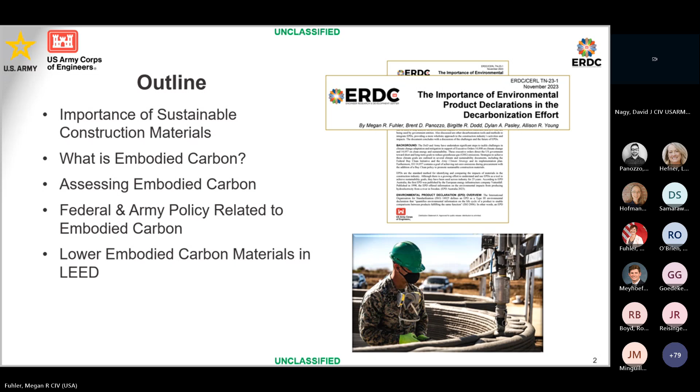In this portion of the presentation, we're going to go through the importance of sustainable materials in construction, a quick lesson on what embodied carbon is and how to assess it, embodied carbon related policy with a focus on some of the latest policy guidance, and a quick look at some LEED credits related to lower embodied materials.

As recent studies have shown and executive orders have addressed, sustainable construction materials are essential for minimizing environmental impact and promoting a greener future. With a major source of global GHG emissions being from the four listed high volume construction materials, there's been a federal focus on tracking, labeling, and reducing embodied emissions in these and other construction materials since Executive Order 14057 was signed into effect.

There are many positive impacts to the use of sustainable construction materials because these materials are less resource intensive and more eco-friendly. Their use instead of standard construction materials allows us to take a larger stride toward the path of environmental preservation. If specified correctly, sustainable materials can also contribute to energy efficient buildings by enhancing insulation and allowing for right-sizing of HVAC units, which can provide savings in energy and lifetime cost.

Indoor air quality improvements occur because sustainable materials emit fewer harmful chemicals and pollutants, which positively impacts human health and well-being. Finally, sustainable materials can be more durable and require less maintenance, which provides a long-term economic advantage.

As I highlighted in green, I'm going to focus on the reduction of negative environmental impacts through these materials, more specifically the reduction of embodied carbon.

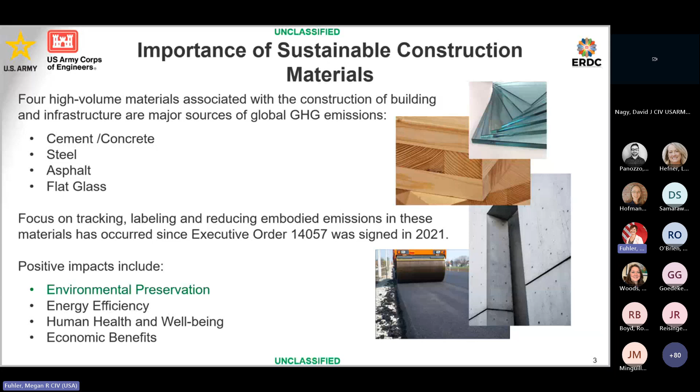But before diving into policy impacts, I want to give you a quick overview on embodied carbon. Embodied carbon is essentially the carbon footprint of a material, building, or infrastructure project. It refers to the amount of greenhouse gas emissions associated with the extraction, production, transportation, manufacturing, maintenance, demolition, and recycling of the project.

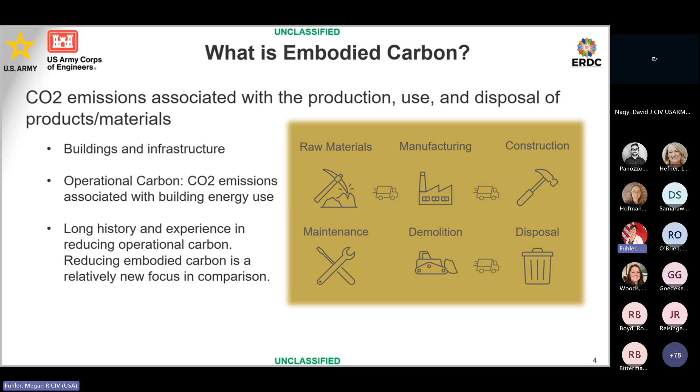It includes both upstream and downstream stages of a material's life cycle. You hear the phrase cradle to gate - this is cradle to grave, looking at all of the carbon involved. This is a bit different than operational carbon, which is the emissions associated with building energy use. Operational carbon has been a focus for quite some time, but embodied carbon reductions are relatively new in comparison.

In terms of assessing embodied carbon, there are several ways to do so. EPDs, environmental product declarations, are intended to help understand the embodied carbon of a product. Standardization is still being developed, but ideally EPDs will be useful in procurement decisions, either by comparing similar products or comparing that product to a product baseline.

That said, product baselines are still also being developed. A little plug here - if you'd like to read more about EPDs, our team did publish a tech note in November of 2023 that has a lot of good information.

Second, life cycle assessments calculate the environmental impacts of a product over its span. These can be done on specific materials or can be calculated on a whole building level. The EPA is currently working on a labeling program to make it easier to identify low embodied carbon products. This labeling program would be similar to Energy Star and WaterSense.

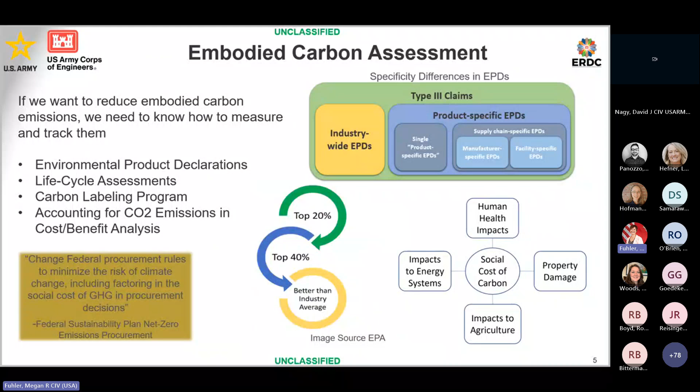In terms of accounting for those CO2 emissions, there's still a lot of work to do. The application of social cost of carbon is probably the ideal solution in order to factor into the decision making. But because these variables are not easily represented in monetary terms, they can often be overshadowed in the cost analysis. As of now, in terms of social cost of carbon, there is not an agreed upon method or value for incorporating that cost.

On to federal and Army policy. There are several applicable federal and Army policies related to embodied carbon. EO 14057 was probably a catalyst towards the GHG emissions reductions, and it lays out some specific and lofty goals regarding GHG reduction and sustainability. Per the implementing instructions, all new construction and modernization projects over 25,000 square feet should be using sustainable materials and low embodied carbon materials as determined.

Many of the other policies listed on this slide speak to net zero emissions procurement goals as well. But because we have new policy guidance out fresh off from the press in March, I want to focus more specifically on that - the Department of Army policy guidance on resilient buildings.

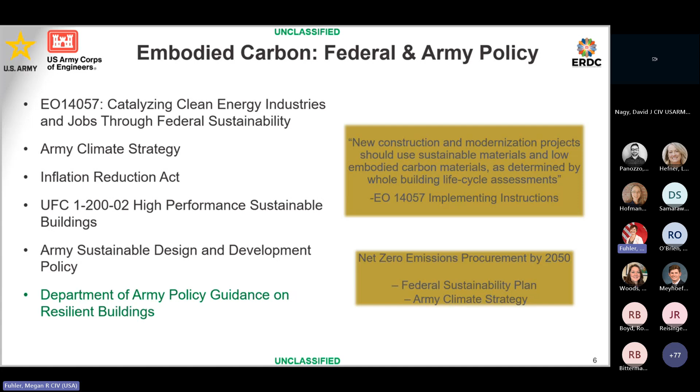This policy guidance is effective immediately for all construction projects other than FSRM. So this is effective immediately for FY27 projects. For FY25 and 26 projects, there is an expectation that proponents evaluate a project for reasonable changes to planning and design to incorporate these efficiencies, unless the cost or project acquisition timeline are impacted in such a way that the completion dates cannot be met.

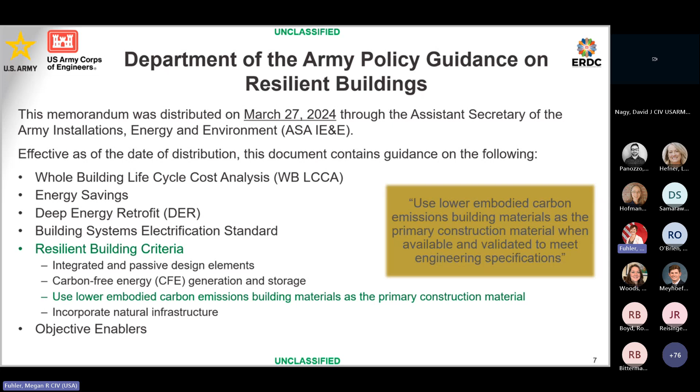This memo touches on many aspects, including whole building life cycle cost analysis, energy savings, electrification standards, and deep energy retrofits, but I want to highlight that portion that relates directly to our sustainable materials research by focusing on the lower embodied carbon emission building materials as a primary construction material.

This policy guidance for lower embodied carbon materials in MILCON indicates that they should be used when available and validated to meet engineering specifications. Regional availability, costs, and impacts on construction timeliness may factor into the use of these materials, but they should be considered as part of the 35% design submittal.

Designers should also be requesting and reviewing product-specific EPDs, type 3 specifically, to evaluate and select those materials. The Army currently has specific pilot projects using lower embodied carbon materials, and they do include LCA documentation, EPD tracking, and other sustainability initiatives that will be used to inform the feasibility for use across MILCON.

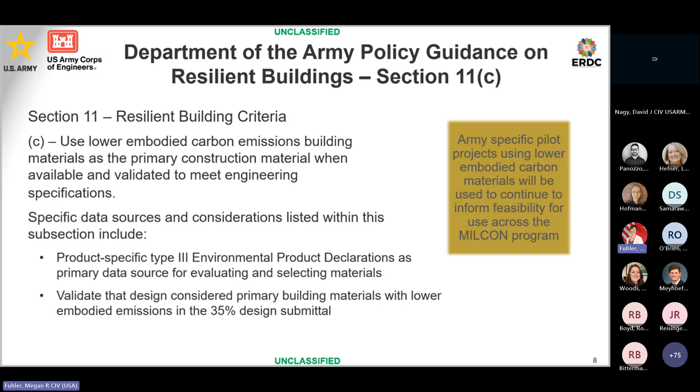This policy guidance will likely lead to the creation of some new ECBs through USACE headquarters and an update to UFC 1-200-02. More information regarding that will likely be forthcoming.

And then finally, before turning things over to Jerry, I wanted to provide a quick overview on LEED with regards to lower embodied carbon materials. I believe there's going to be a more thorough look at LEED in a future webinar, but I will focus only on the materials and resources category. As most of you probably know, any new or major renovation project requires LEED Silver, and there are several credits directly related to embodied carbon, including EPDs and whole building LCAs that can get your project closer to meeting that LEED Silver requirement.

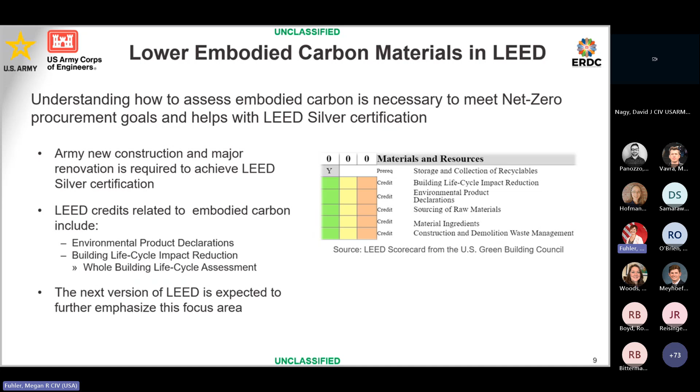I went through my slides pretty quickly, but now that you have a brief overview of sustainable materials with a focus on embodied carbon, I'm going to hand things over to Jerry, who can give you some more specifics on sustainable concrete.

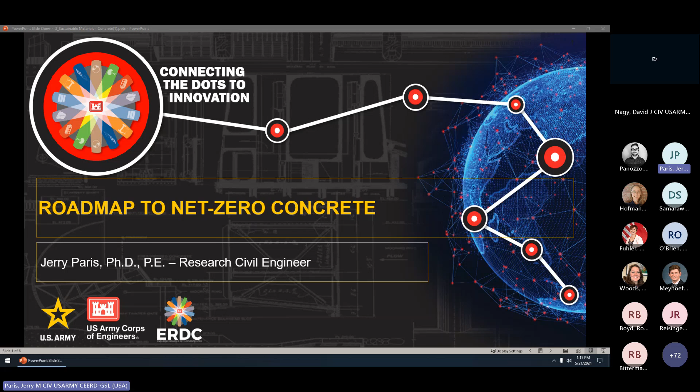So essentially what we're going to be talking about is where we're at, what the goals are, where we're going, and hopefully how we're going to get there.

So as Megan was talking about a little bit earlier, there are some policy drivers that essentially started with Executive Order 14057, or the Buy Clean Act. Essentially the main edicts here were the 50% reductions of emissions by 2032, along with a net zero building emissions qualifier by 2045. That kind of pushed the tri-services groups to come up with climate implementation plans. So for the Army climate strategy, they kind of followed the executive order pretty much to a T, with the 50% reductions by 2032 and net zero by 2045.

The Navy was similar, but with a net zero by 2050. And then the Air Force climate campaign plan was following the executive order, but shifted by about a year, following in total with the DoD climate adaptation plan, which has a net zero by 2050.

And in general, these on the surface look pretty understandable. Everyone kind of knows what net zero typically means, effectively zero emissions. But the complication here is the 50% reductions, right? As you start digging into that, you start asking the question of 50% reductions of what? And that's a little bit of the nebulous portion here.

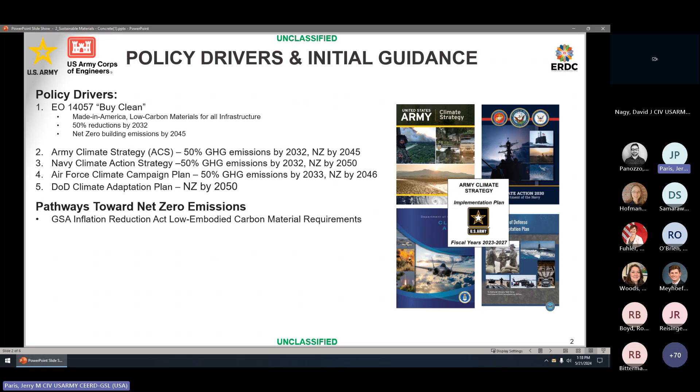So what the industry is doing at this point is saying, okay, we're going to try to make up greenhouse gas limitations. This has been done by a couple different groups. GSA has the Inflation Reduction Act for low embodied carbon material requirements, which we'll talk about in a second. The American Concrete Institute has a number of committees related to sustainability, including the most recent one, 323, the Low Carbon Concrete Code Committee, as well as other groups such as the Carbon Leadership Forum.

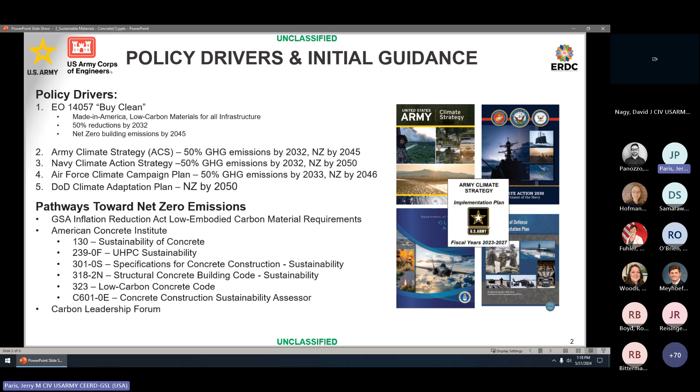And what these all tend to do is prescribe greenhouse gas emissions limits as a function of concrete strength. So what this generally looks like is you'll usually have a table that will give you emissions limits in terms of kilograms of CO2 per cubic meter as a function of the concrete strength.

So if we look back at the Carbon Leadership Forum for 2021, this generally makes sense. As the concrete strength goes up, you typically need more cement, so your limits tend to be higher with the higher strengths, and that generally makes sense.

In this document, they noted that they are treating a baseline as a static reference against which to compare progress towards a goal, which is exactly what we want, right? We want a baseline value, because ideally we're going to go back to that 2005, 2008 timeframe.

So having some sort of a baseline to work off of is great. And then two years later, they produced more baseline values, and they're dramatically lower. They removed the definition of what they are considering a baseline. What ends up happening is, for this data set, this baseline is actually representative of a 30% fly ash replacement, or removing 30% of the cement within a concrete and replacing it with a waste material. That's why these numbers are considerably lower than the data set from two years prior.

If we look at the GSA values, there are different limits for the top 20 versus top 40 and top 80%. But what you'll notice is that the limitations to meet a top 20 for the GSA limits are actually even lower still. And then we get to the ACI 323 limits.

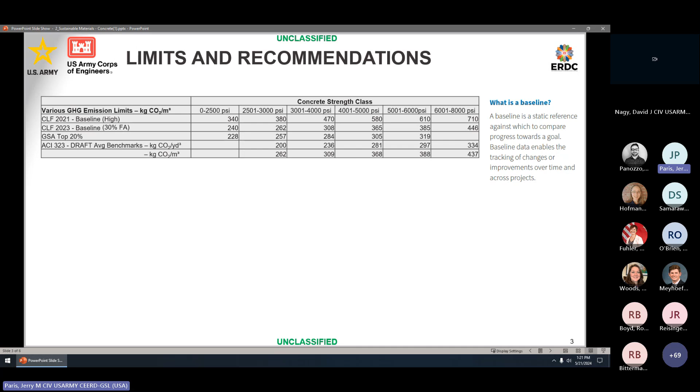What you'll notice is that these are very, very similar to the Carbon Leadership Forum 2023 baseline values, that 30% fly ash replacement, because they're working from the exact same data set. So all of these numbers should be very, very similar.

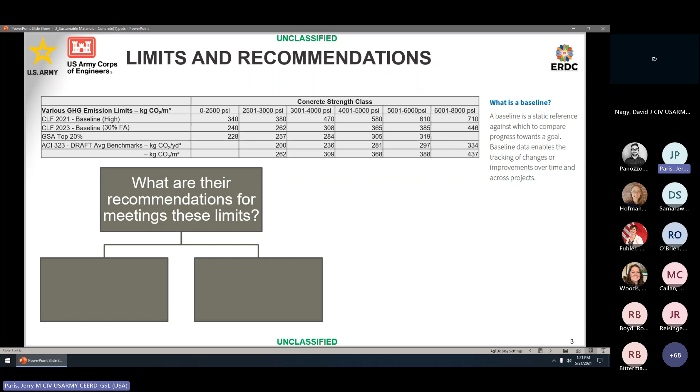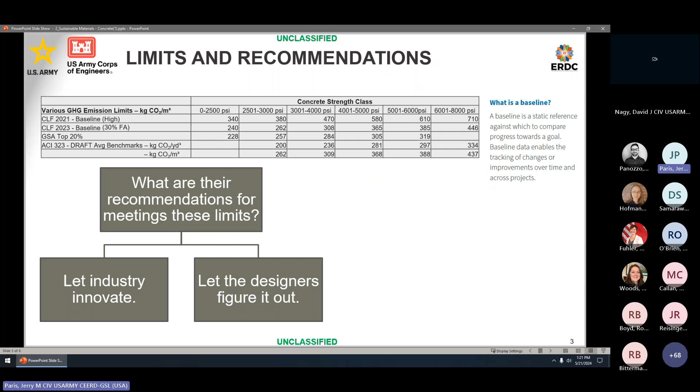So the problem that I foresee with this is that as we start looking at these, they are giving limits, but they're not really explaining how to reach these baseline values. In general, there seems to be two ways that they're approaching this. One is letting the industry innovate, just saying that our concrete and cement producers are going to have to get better products. The second is letting the designers, the engineers and the architects figure it out for themselves. To me, this appears to be a little bit of kicking the can down the road.

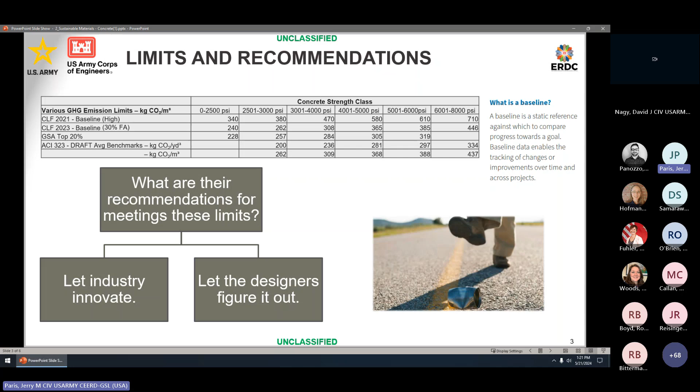So ideally, what we are trying to do is be the bridge between the gap of what you have to do and how do you actually get there. What we are trying to do is develop realistic plans. I've got this as a proposed plan. Nothing is finalized in this, but this is generally what we're working towards currently.

If we look at the three main sources of limits, ACI 323 provides about 30 pages of specifications, whereas the GSA and the Carbon Leadership Forum can essentially be broken down into a table or two. Our plan is to start with the ACI 323 document because it is the most developed currently. Their general approach is they break up the United States by region and choose benchmark values dependent on where you are located, because there is geographic pressure into what you can and can't do for cement production. So it makes more sense to break it down geographically.

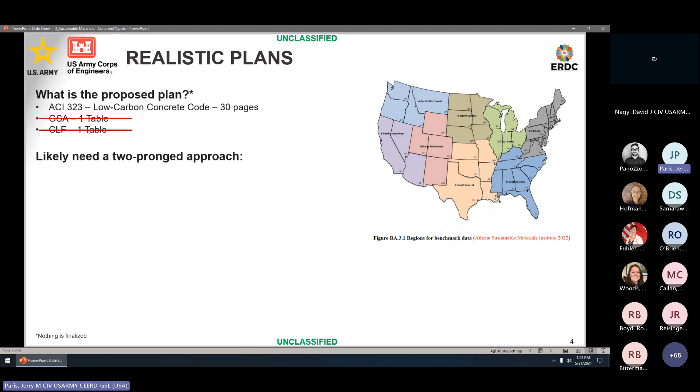As we move forward, there needs to be a two-pronged approach, because we have the 50% reduction by 2032, as well as the net zero by 2045, 2050. For the longer term approach, it's a lot more nebulous. Essentially, what we need to do is foster long-term innovations that deviate from known technologies toward net zero emissions.

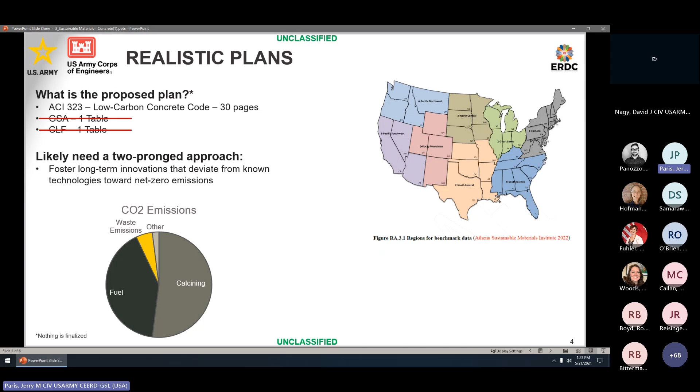And what I mean by that, this is my opinion, is that the current process by which cement is produced, I don't foresee that process being net zero, because if we look at the emissions as a function of Portland cement production, over half of it is coming from a calcination process, where you take limestone and heat it up until you drive off the CO2, and you're left with reactive calcium oxide. That's what that portion is. So if we were to have zero emission fuels and waste emissions today, we would still not be in a net zero process.

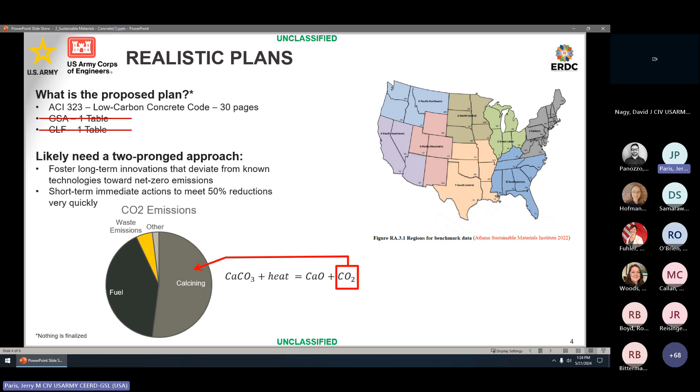In my opinion, I think we need to look at other processes that get away from this calcination in order to meet that large emission drop of net zero by 2045. But in the short term, there are immediate actions we can do to meet 50% reductions, and we can do that today.

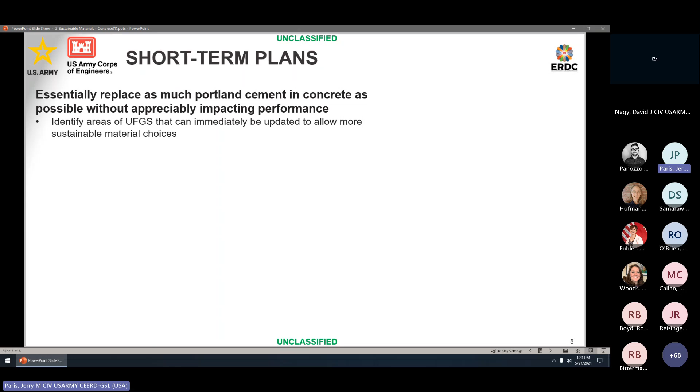So that's what my last slide is going to be about, how we can meet these 50% reductions today. Basically, we need to replace as much Portland cement in the concrete as possible without appreciably impacting performance. So what we've been doing is looking at different areas of the UFGS that can be immediately updated to allow more sustainable material choices.

A couple examples of this are in the UFGS for cast-in-place concrete. We've just got this approved, it's now in there as of February. We are allowing Type IT cements, which are ternary blended cements—a cement with two replacements blended into it.

These have the ability to reduce emissions by up to about 70%. The more realistic case is probably going to be 30 to 50% as they're delivered to the concrete ready mix producer, so they can do replacements in the field or at the ready mix facility as necessary based on the project. But we can pretty much almost hit those targets today. So those are now allowed in the cast-in-place spec.

We're also debating about including an over-design limit. For structural concrete, in order to guarantee that the vast majority of your concrete meets the minimum design strength, there's an over-design. So what we're thinking about doing is including a limit to how much over-design is built into it. As an example, this is a chart of over 850 production mixes from a ready mix facility. On the x-axis is the design concrete strength, and on the y-axis is the actual measured strength at 28 days.

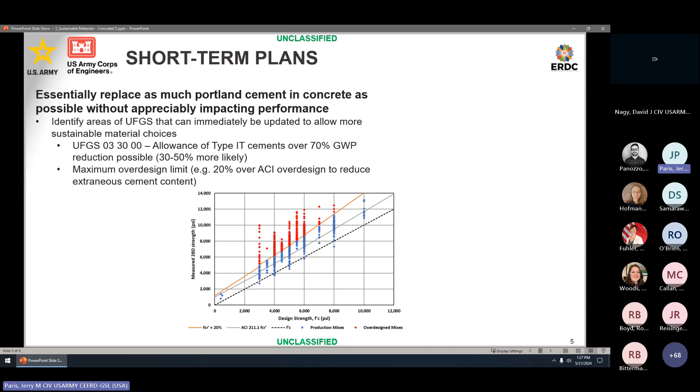For instance, the mixture is at 3,000 PSI—there's no need to have 8 to 10,000 PSI strength concrete when your design is 3,000. So you would be limiting it to about 5,000 maximum, and that requires the cement loading to reduce.

The other things that we're doing is we want to include materials that are performance-based, rather than things like fly ash or slag that have specifications. We want to look at performance qualifying material.

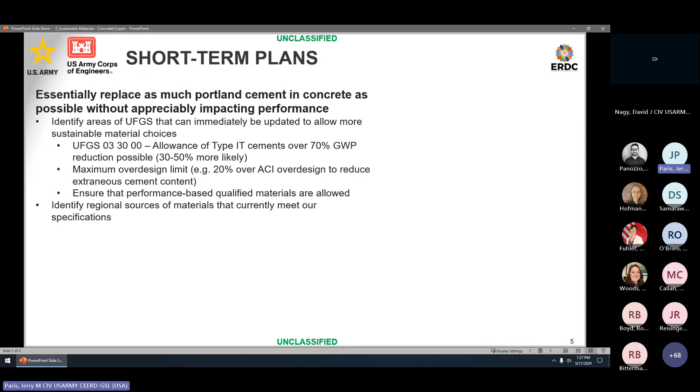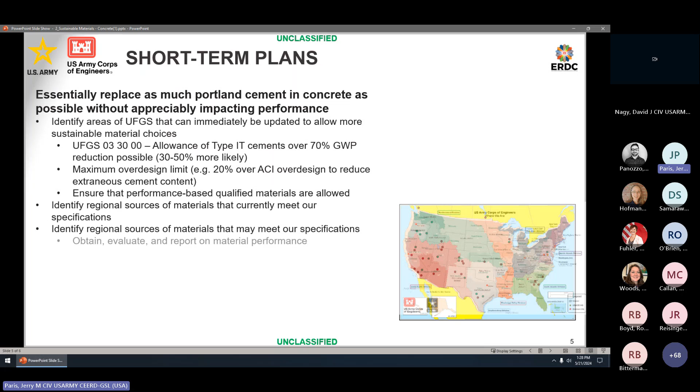And then lastly, and I think this is going to be the big push here, is we're trying to identify regional sources of material that currently meet our specifications, as well as regional materials that might meet our specifications. What we're attempting to do is locate these different places throughout the US and overlay them with the USACE divisions to see where these different materials lie. Then we're going to get these materials in-house and evaluate them for performance in concrete.

Ideally, we're going to take all of the information we gain and produce region-specific user guides that tell the user in different regions where the available sources are within their regions, how those different materials can impact concrete performance, and specifically if there's anything about those materials that dramatically reduces performance. For instance, does a certain cement replacement make the concrete worse in sulfate resistance or freeze-thaw resistance, so that you can apply that information to your particular application to know maybe one material is better for you than another. And we also want to incorporate reductions of global warming potential into these.

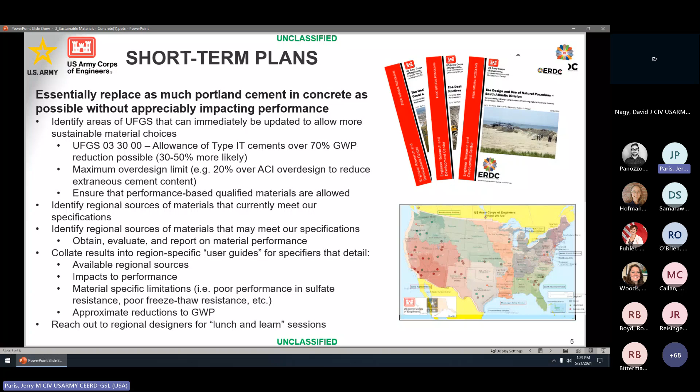And then finally, we want to reach out to the regional designers within these divisions once we have these user guides to do a lunch and learn session, to say here's what we've produced and how you would use these, and talk with your contractors to try to get these materials used to reduce global warming potential and emissions numbers down to those target benchmark values based on the strength classifications.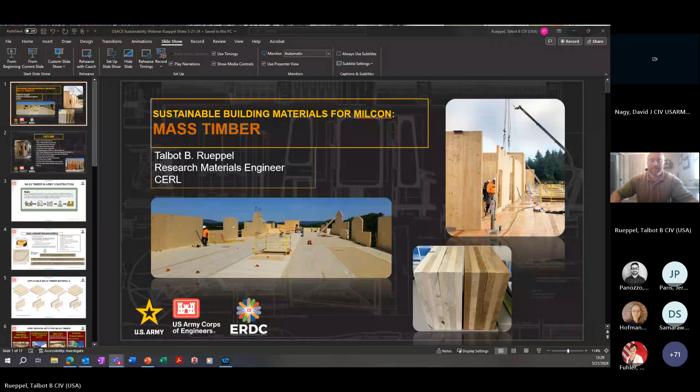Thank you all for making it out today. My name is Talbot Rueppel. I'm a research materials engineer here at the Construction Engineering Research Laboratory in Champaign, Illinois. Today I'm going to be speaking to you about mass timber and how it is a sustainable building material for military construction.

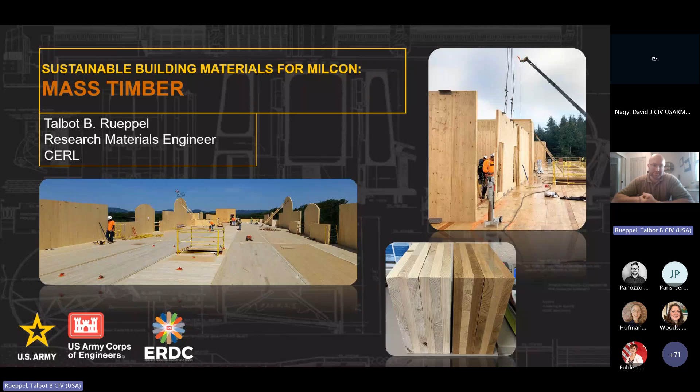An outline for this presentation: I'm going to start with the bottom line up front and go into how and why we want to use wood as a resilient building material. We'll speak about some of its attributes, as well as delve into some of the mission sets for which mass timber can be applied for the Army. Then I'll go over a couple of examples of mass timber proven in military construction, and that will bring us into some efforts for the Army to bring mass timber construction and design in-house rather than using a third-party agency to lead the design of a building.

This is through the 6.4 Research, Development, Test and Evaluation Project, Mitigation of Greenhouse Gases in Military Construction Materials. Two direct results of that were a mass timber engineering and construction bulletin, as well as a large technical report focused on concrete, mass timber, and asphalt materials and their sustainability attributes.

This will lead us into some relevant criteria and standards related to mass timber, some current early design considerations that have come to fruition through these pilot projects, as well as delving into some current mass timber EPDs, and then near-term and long-term modernization priorities and research requirements, respectively.

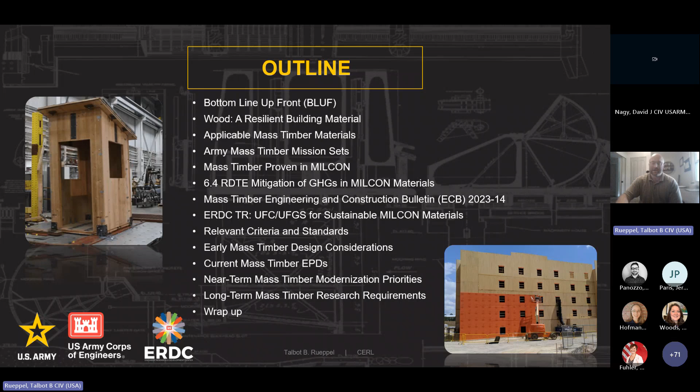So the bottom line up front: as one of the largest landowners in the world, managing over 550,000 facilities, the DoD needs to bridge the gap between public institution, private industry, and academia to design and develop with renewable lignocellulosic building materials such as wood, in pursuit of the Army climate strategy and Army installation strategy goals.

This involves sitting down with experts in the field and in academia, learning from them and working with them, and then being able to translate that into educational materials for our engineers who can then draft and build with these materials long term.

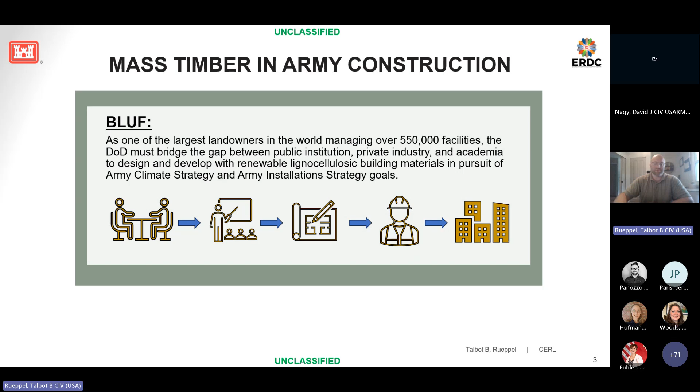Looking into the Department of the Army policy on resilient building materials, there are three main attributes a resilient building material must have. Number one, maximize the ability of the military to withstand and recover from disruptive events, such as extreme weather or disruption to energy and water supplies. Number two, a material must have minimal energy and water demand. Number three, it has an indoor environment optimized to promote humans' health and safety.

Wood can meet all of these resilient building material criteria in one way or another. It's abundant and regenerative. Using wood results in avoided embodied carbon as opposed to alternative materials. Wood is also lightweight, reclaimable, and durable when properly designed with. It's biophilic and improves indoor air quality. It's also aesthetic and offers design flexibility through prefabrication methods.

Wood is also 5 times lighter than concrete and 15 times lighter than steel. This dramatically reduces your transportation requirements and labor requirements on site. It also costs 20 to 30% less per square foot for 1 to 4 story office buildings compared to counterparts. Really, this is the optimal design criteria and profile for a DoD building, as the DoD typically does not build much higher than 4 to 6 stories.

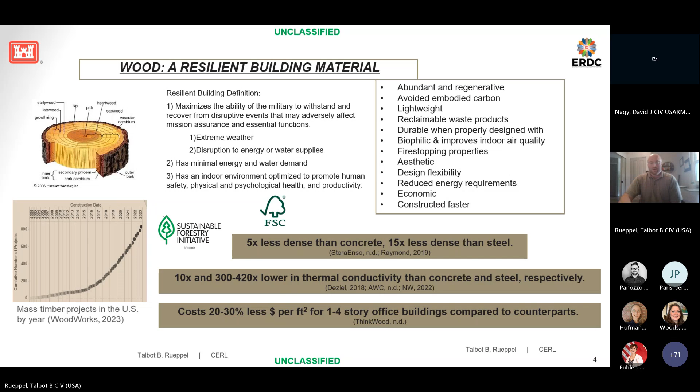There's also dowel laminated timber (DLT) and nail laminated timber (NLT). Mass plywood panels are another very good product that enables the use of wood as either a load-bearing application or a spanning application. It essentially can serve as a hybrid product between CLT and glulam. There's also laminated veneer lumber, which is typically used for load-bearing applications for columns and beams, parallel strand lumber, and laminated strand lumber.

Essentially, what all these mass timber materials do is enable the use of wood for applications which could not be met with traditional dimensional lumber products. It enables the use of wood for larger applications.

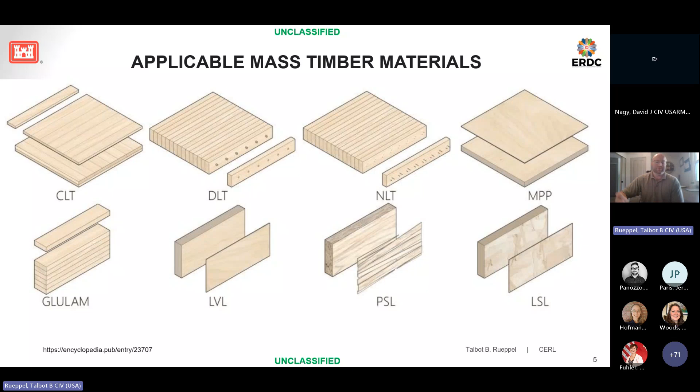The mission sets to which mass timber applies are forward operating bases, anti-terrorism and force protection, as well as military construction and historic preservation. Today we are focusing on military construction, in which actually 4 cross-laminated timber hotels are operational through the Army via the Privatization of Army Lodging Program, which we will discuss now.

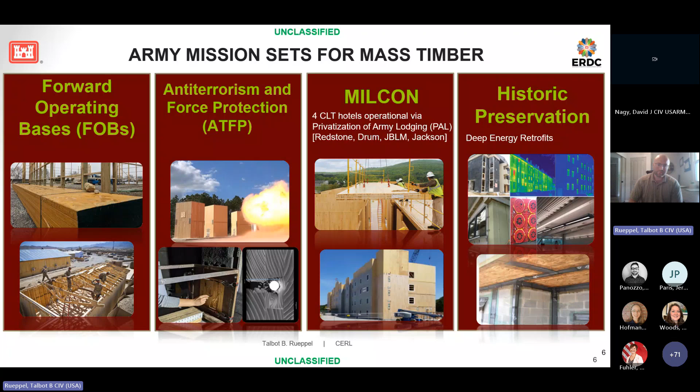Mass timber has been proven in MilCon. Back in 2016, the Army funded the construction of the first cross-laminated timber hotel in the United States. However, none of the design was performed in-house; it was essentially outsourced to Lendlease, a design build contractor, who has completed 4 hotels of cross-laminated timber and will complete their 5th at Fort Liberty in North Carolina in 2026.

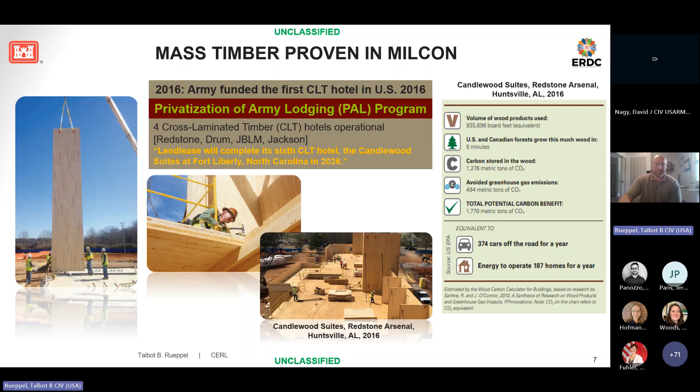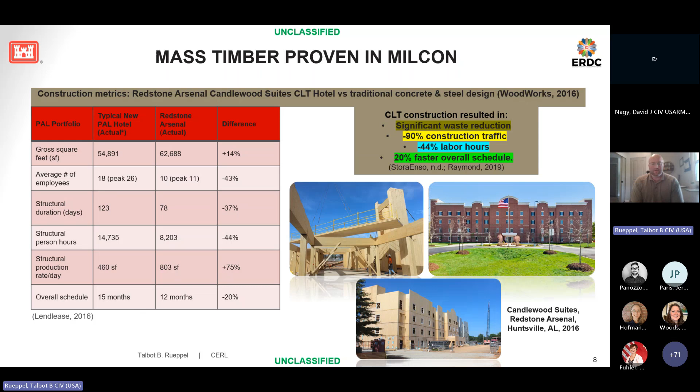I want to go into some more metrics that were a direct result of the Candlewood Suites construction back in 2016. Using CLT construction resulted in significant waste reduction compared to a typical concrete and steel structure: about a 90% reduction in construction traffic, nearly a 45% reduction in labor hours, and a 20% faster overall schedule. The average number of employees was nearly cut in half, really because prefabrication methods within the mill take care of and mitigate a lot of the required on-site labor.

So the Army wants to be able to design and build with mass timber in-house rather than having to use a third party to lead these efforts. What that requires is that we educate our professional engineers and structural engineers to be able to build with this material. Although it's not really a new material, to the U.S. industry and especially to the DoD, it is.

With this effort came the 6.4 Research and Development Technology and Integration Program titled Mitigation of Greenhouse Gases in Military Construction Materials. Task 1 involved strategy and coordination. Task 2 involved life cycle assessment of the Task 3 through 5 materials, which were low carbon concrete, timber, and recycled asphalt. Task 6 was ultimately transition and modernization.

Our goals for this project were really to identify low-hanging fruit, unified facilities criteria, and unified facilities guide specifications of which we could implement criteria change requests immediately. Further down the line, we wanted to leverage the expertise of industry to demonstrate the use of commercially available off-the-shelf materials in a relevant mission set and Army environment. Thereafter, we wanted to assess the constructability metrics and perform a life cycle assessment on those systems. This is an ongoing effort in which we plan to have a lot of innovation.

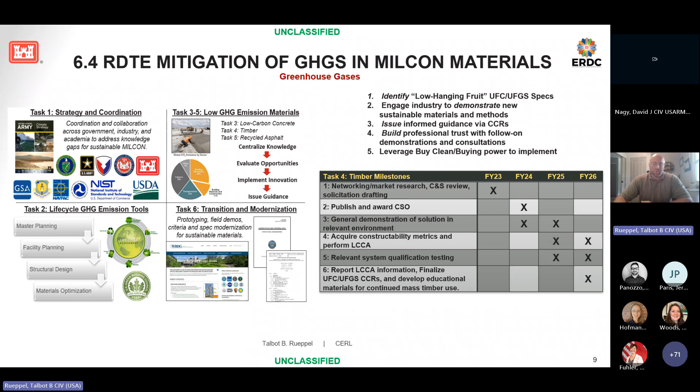One direct result of this project, back in fiscal year 23, was this Mass Timber Engineering and Construction Bulletin titled Mandatory Consideration of Mass Timber in Army MilCon and Civil Works Vertical Construction Projects. The key takeaways are that project delivery teams must consider at least one mass timber structural solution starting in fiscal year 26 for military construction, and all structural systems considered during design must be documented via a life cycle cost analysis.

However, a full life cycle analysis is not required. So a life cycle cost analysis at this point is required, but a life cycle assessment is not. Also, ending with a report describing the analyzed structural systems and justifications for non-selection and selection of the primary structural material is required as well.

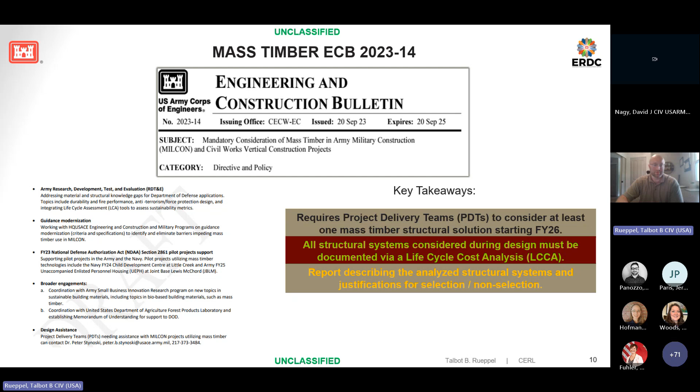Another direct result of this 6.4 RDT&E program was a technical report titled Unified Facilities Criteria and Unified Facilities Guide Specs for Sustainable MilCon. This included the concrete, asphalt, wood, and life cycle assessment tasks. Here's just a few of the table of contents directly from the wood product section. This is a very large technical report that's going to be published by the end of this fiscal year.

Table 14 is an example of some of the things we're looking at, particular to mass timber construction. A lot of it has to do with integrating updates to the International Building Code, which includes 3 new building types within Type 4 mass timber construction. Previously, the 2018 International Building Code only had heavy timber construction as Type 4. Now Type 4 is broken up into 4 subsections, including heavy timber, Type 4A, Type 4B, and Type 4C construction. Type A through C is essentially dependent on the maximum allowable height and number of stories.

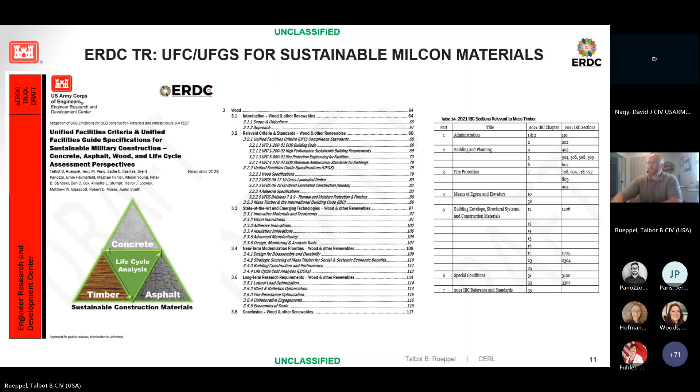Some relevant mass timber criterion standards which we have been assessing are the DoD Building Code, high performance and sustainable building requirements, fire protection engineering for facilities, and DoD minimum anti-terrorism standards for buildings. The Unified Facilities Guide specifications we're focused on are really all in Division 6, wood, plastics, and composites. The 2 UFGs are limited to 2 mass timber products: cross-laminated timber and glue-laminated timber. Various updates are required and needed for those UFGs, and a lot of these updates will come directly from the International Building Code Industry Standard 2021.

Some other industry standards which we are considering, and which play a major role in the design of these buildings, are the special design provisions for wind and seismic. This is particularly important in Class 4 and Class 5 environmental severity classification regions. This is really coastal regions in which wood, cross-laminated timber, and engineered wood should not be exposed to the elements. There are extra cautions needed when building in those regions, and some restrictions in which CLT shear walls, for instance, cannot be used to some extent. There are also product standards for glue laminated timber, as well as the adhesives used for these materials.

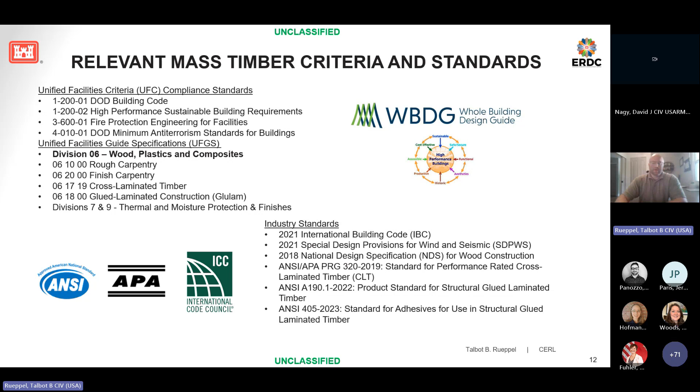Some mass timber design considerations we have found early on came from speaking to engineers involved in these pilot projects, one of which is the JBLM barracks out in Tacoma, Washington. These pilot projects will be discussed much further in detail next week. But really, upfront planning has proven to be very important within mass timber construction. There's a lot of building information modeling coordination that must happen between manufacturers, designers, as well as builders.

There are also some conflicting sustainability versus anti-terrorism and force protection requirements. For example, sustainability efforts call for essentially having larger windows to enable natural sunlight to enter the room for natural heating and ventilation. However, ATFP requirements call for smaller windows to prevent any chance of projectiles entering. Another example is standoff distances, where ATFP wants maximum standoff distances, whereas sustainability efforts see those standoff distances as minimizing connectivity within the workplace or living space, whatever the building is.

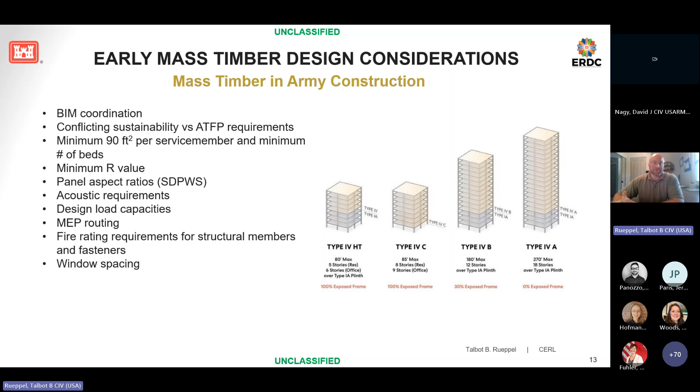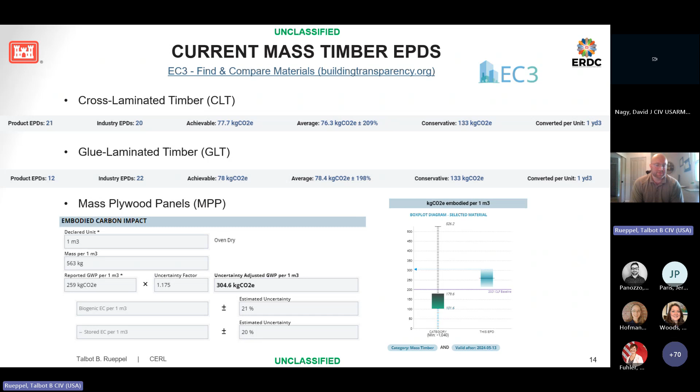Some near-term modernization priorities for mass timber in Army construction are to optimize the material strength and durability with novel treatments and finishing solutions. We want to demonstrate commercial off-the-shelf occupiable components and systems in DoD applications.

We know that in the industry this product is being widely utilized, so there's no reason why the DoD should not be using these materials. We want to make these materials and systems lightweight, modular, and designed for disassembly, and ultimately deliver relevant criteria change requests to streamline the use of these materials for our engineers in the field.

And we also want to assess the building construction efficiency and building envelope performance metrics as compared to traditional materials, as well as perform life cycle cost assessments.

There's also a mission set not directly related to mass timber materials specifically—this is more for wood packaging materials—but mold mitigation is a very big issue, particularly for the Joint Munitions Command. All of the innovations that stem from this problem set of mold mitigation can be implemented into larger structural components like mass timber and building systems.

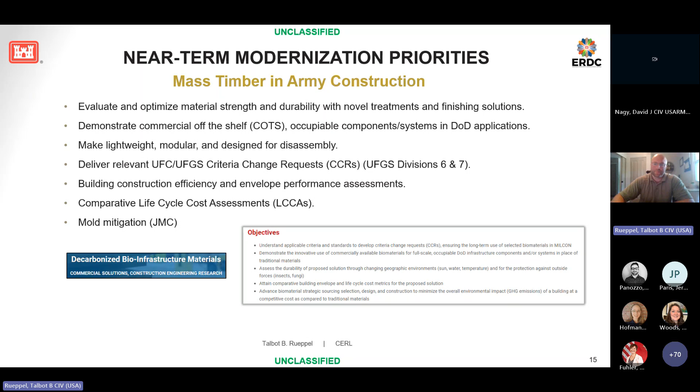Some long-term research requirements for mass timber are really to adopt environmental product declarations that are widely utilized in the industry, and to coincide with the growth of the industry in terms of knowledge and implementation, learning from Woodworks, the largest design and consulting firm in the U.S., a nonprofit organization that assists with all mass timber projects in the U.S. We want to advance our biomaterial strategic sourcing, design, and construction.

However, there's quite a big gap, especially in the Midwest, where there's not as much tree cover, so there are some logistical obstacles that need to be met.

However, it's been found that the transportation cost for wood versus other more dense materials is a fraction of the cost, and wood can be shipped over much longer distances than traditional materials at a fraction of the cost. So there should be some relevance there in terms of the lightweight nature of wood.

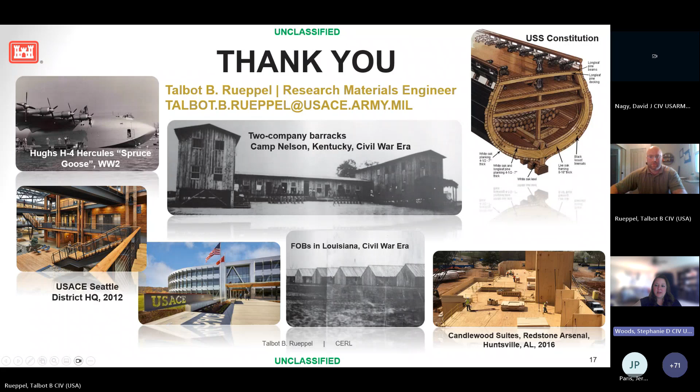You mentioned about coordinating with timber manufacturers early in the project. Have you run into proprietary issues when using a specific product for Army construction?

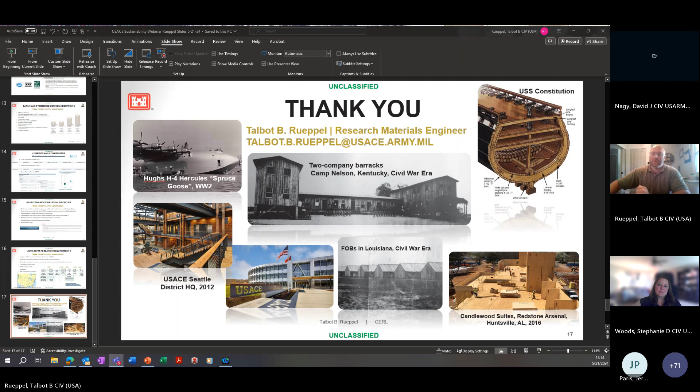We have not run into any proprietary issues regarding layup of the composites at this stage. However, I think once the composite reaches a certain design stage, especially when interacting with field engineers, some CUI does come up, but at this point the layups are pretty universal.

There's not a whole lot of claims that companies can make with some of these materials unless they're using a certain additive within their adhesive or coating system. One thing we're actively working on and researching at CERL is thermal modification of wood. Thermal modification isn't a new process—it's essentially pyrolysis of the wood, baking the wood in the absence of oxygen.

There are some manufacturers exploring this possibility. But even so, if they were to come out and say their cross-laminated timber has thermally modified benefits, they wouldn't be able to claim that as a patent or anything like that. But we have not faced any of those issues quite yet.